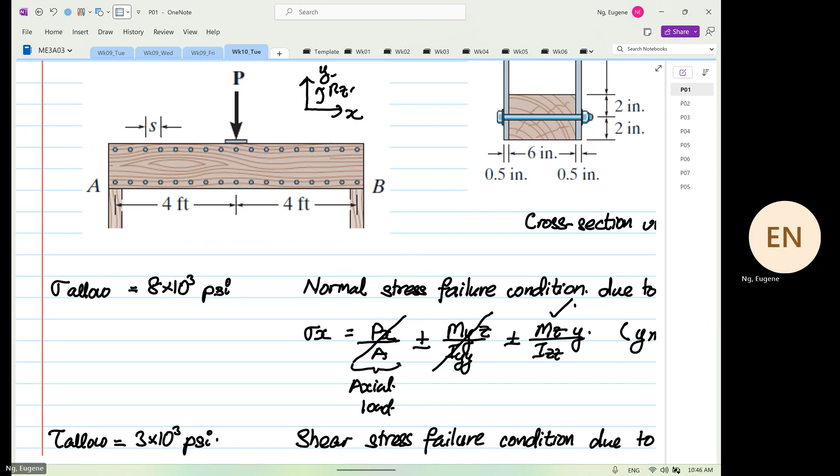So how do we do the experiment? I'm going to draw the schematics out.

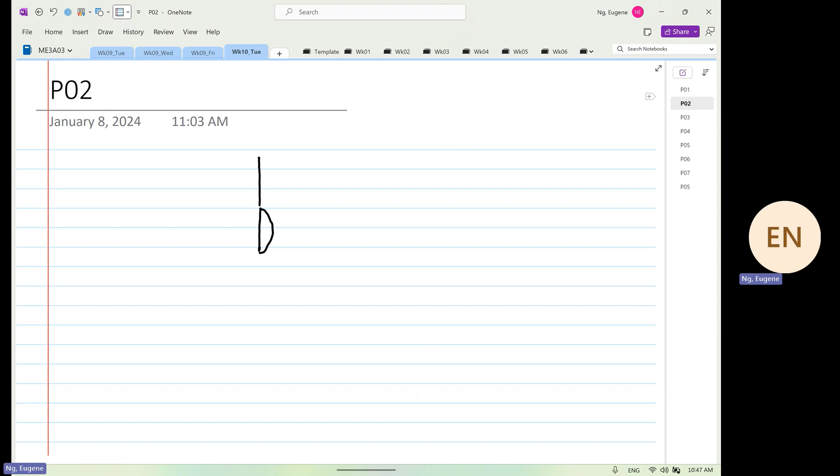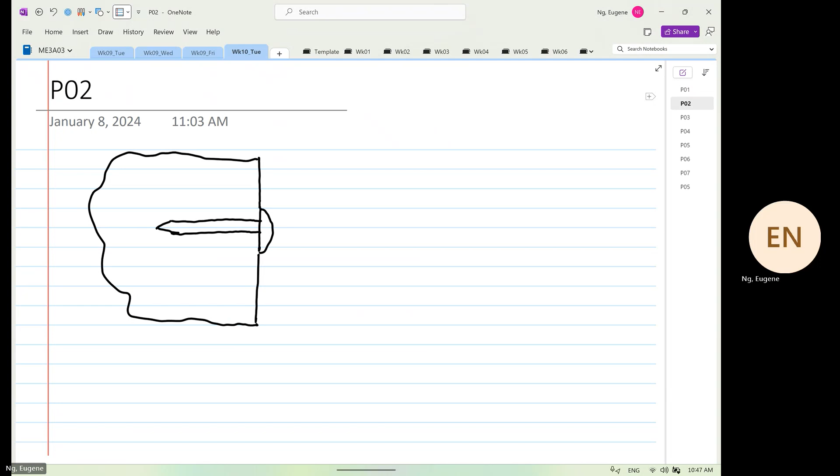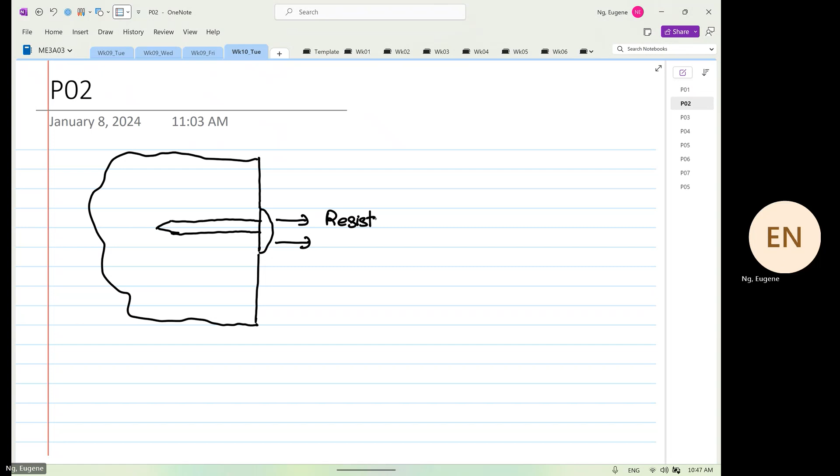So this is our nail, and this is a piece of wood. And this is our nail. To pull the nail out, you pull in this direction. So this is the resistance force. Let me put it as 1 nail. That is your resistance force.

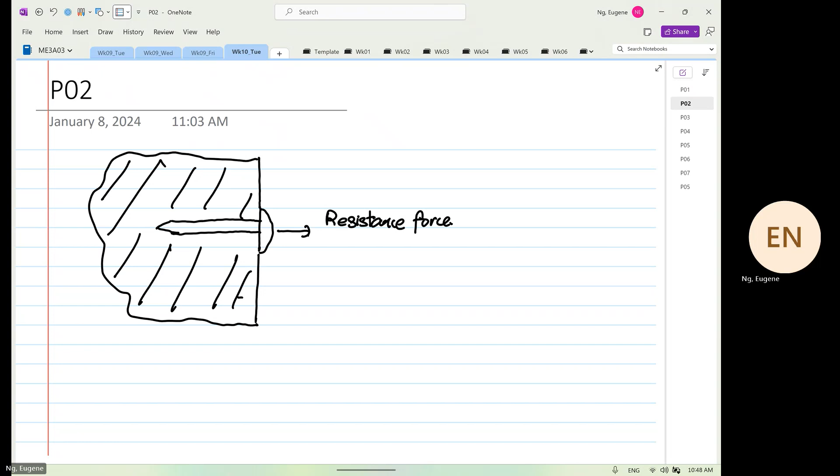Can someone tell me how this is related to shear flow or shearing stress? Anyone? Yes, there's a reaction force, but where is the reaction force acting on? If you pull out the nail, what surface are you hitting on? Vertical or horizontal surface, as you can see down there. So which part, is it the head or the body?

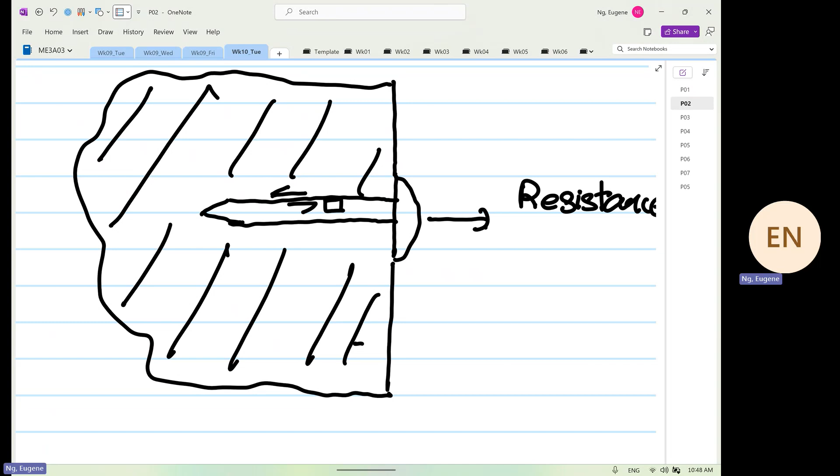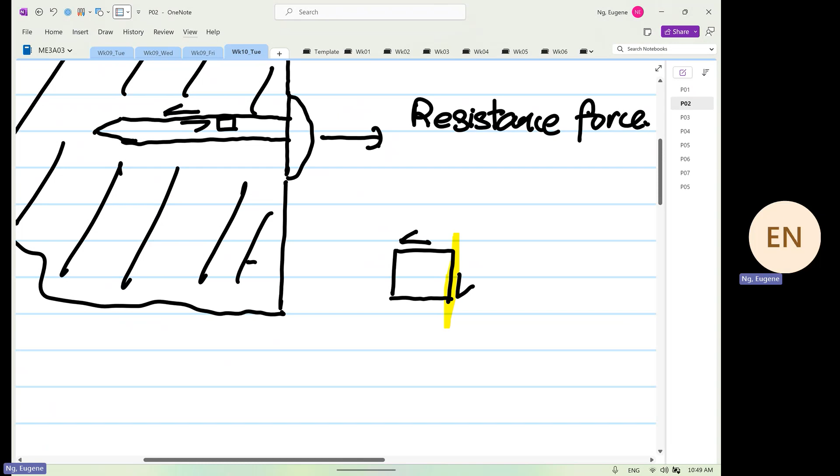Good. Where the resistance is, the nail wants to pull out this way, the resistance is doing this. If I put an element down here, the element will now look like this. This is the resistance force or resistance stress. And if we look at shearing stress, we calculate shearing strength on which surface? The vertical surface. Are we clear? So that is why when we determine the shear flow, we are still looking at the vertical surface.

This has to be very clear because the orientation is not the same. The orientation of the nail is running in the horizontal direction. Why are we calculating the vertical face? Exactly like how I explained to you why we consider the vertical face when analyzing shear failure. Are we clear?

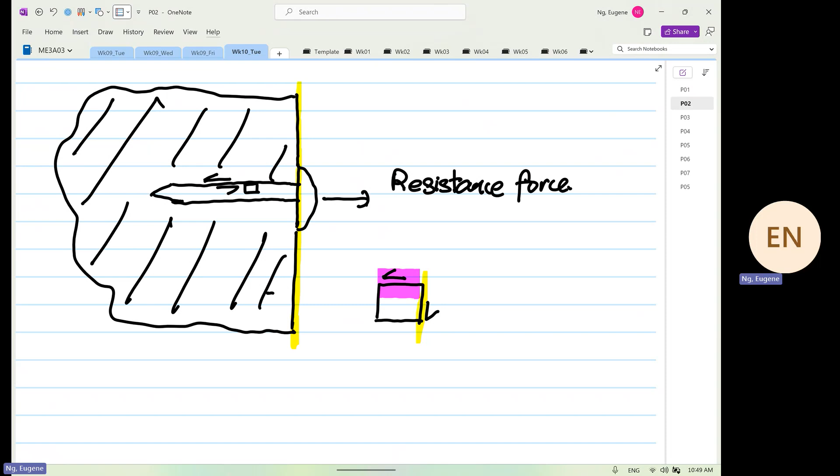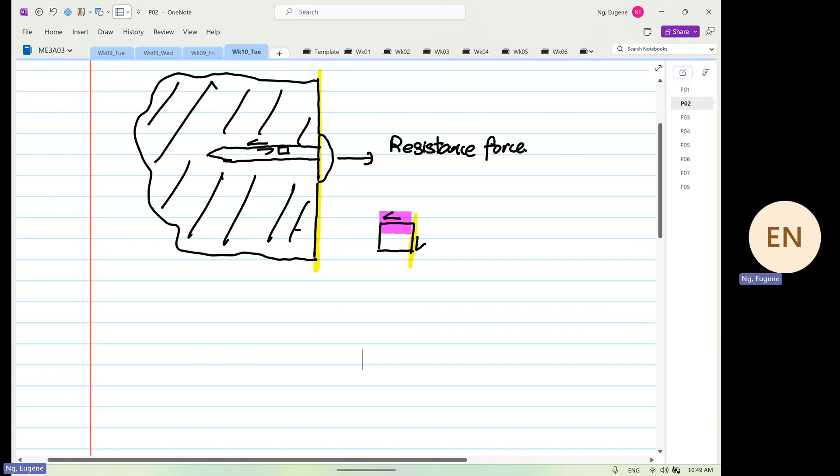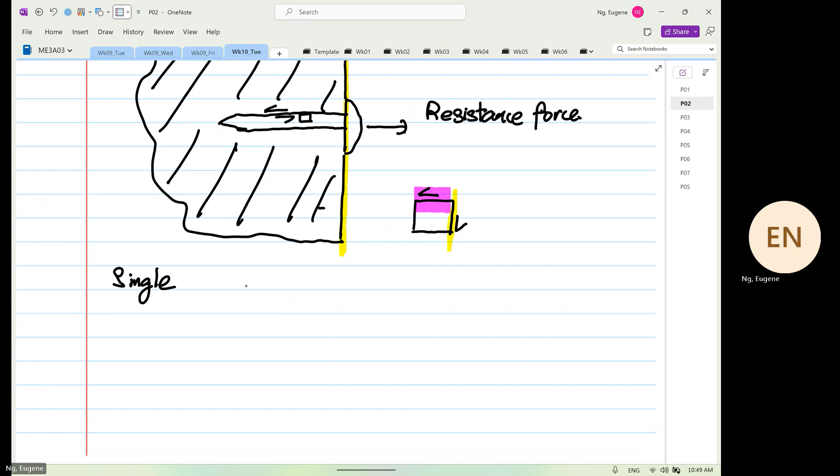Now, the next thing I'd like to recall for you is that in nails or fasteners, we have two things: single shear, and double shear.

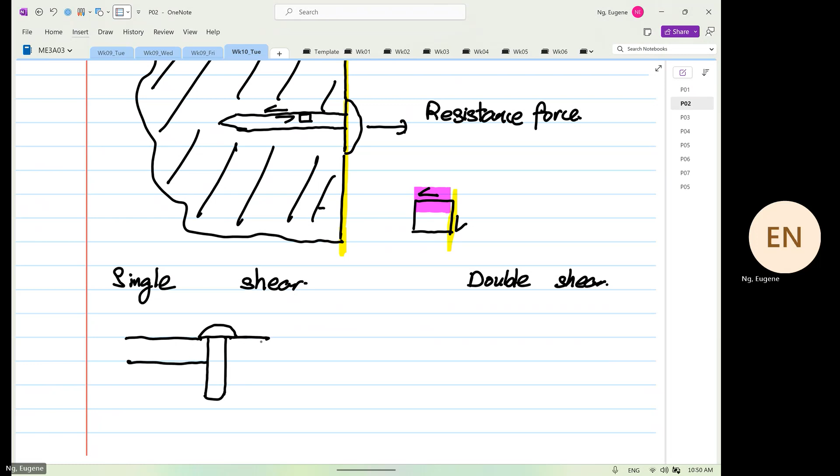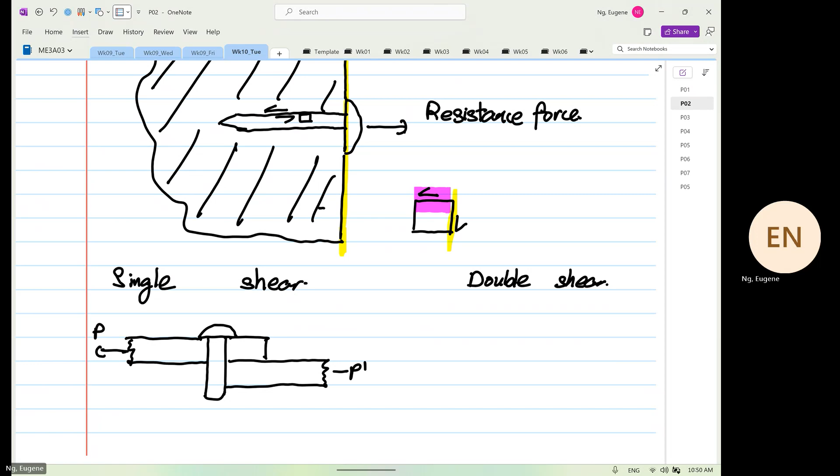Just to quickly recap with you, if I'm going to draw a single shear configuration, for this case, the shear stress is equal to P over A. This is your A, this is where failure will occur.

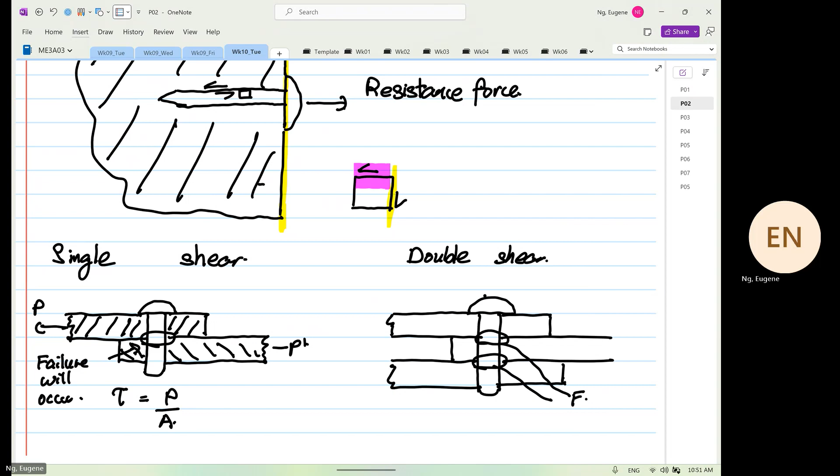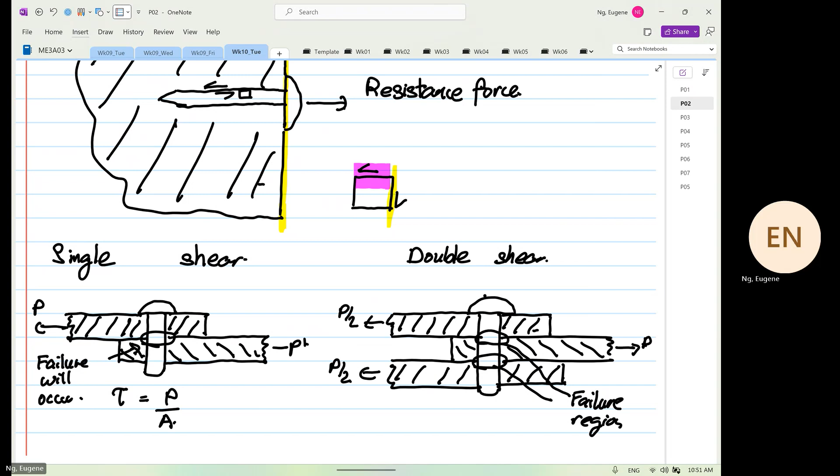In double shear, draw the nail first. So these are the, and these have an extension, do apologize. And for double shear, failure will occur in these two regions. So for this case, the shear stress is equal to P divided by 2A. The 2A is because the distribution is across twice the area. Are we clear?

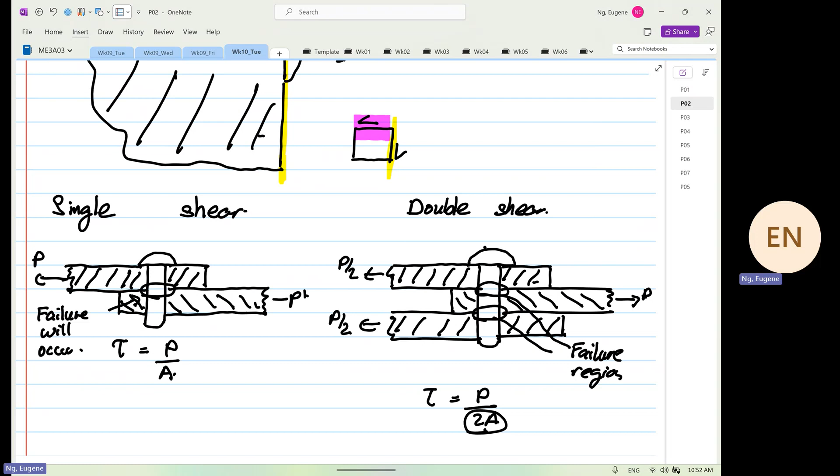So now, you know there's single shear, there's double shear. If you look at this structure, is it single or double shear? Anyone? Yes, double shear, well done. This is a classical case where you have double shear, when you have a shear force coming over here as Vy.

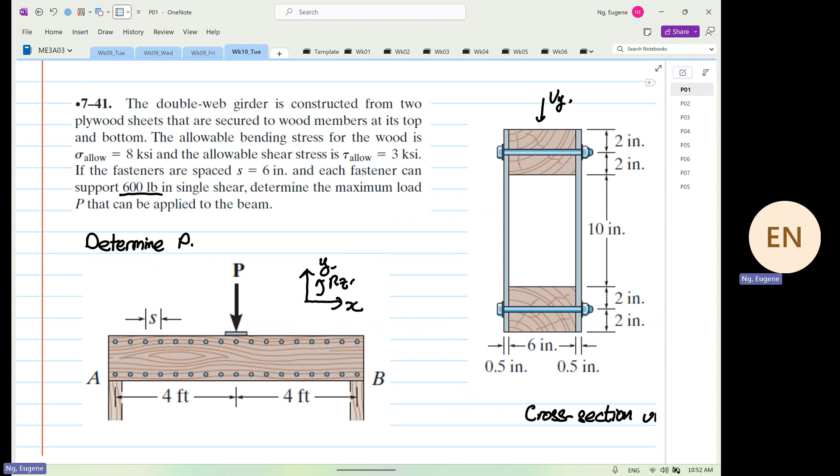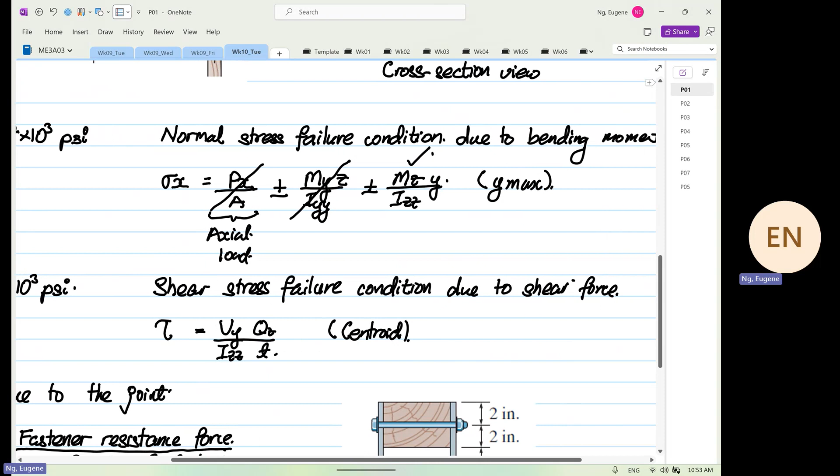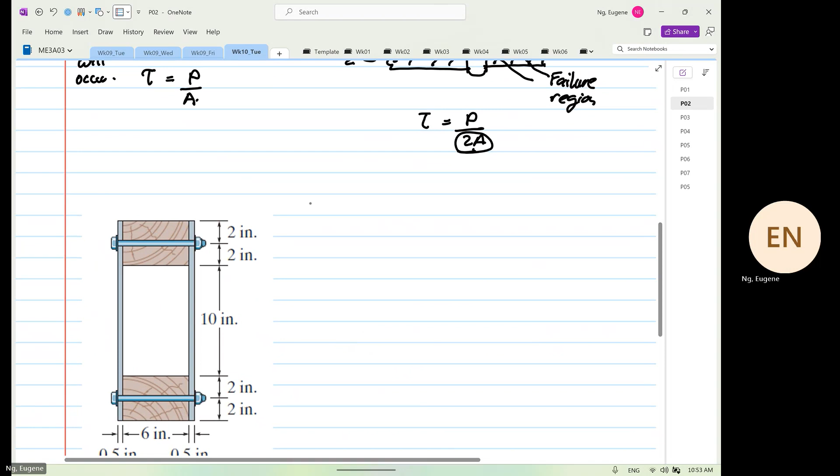So now we've got everything sorted out. We already know that failure will occur due to three reasons: failure due to bending moment, failure due to the shearing stress from the shear force, or failure at the joint. So now let's do the first thing first. Let's focus on what we're going to do first, which is failure due to the fastener.

Okay, we are going to determine failure due to the fastener first. So the first thing we are going to do is determine Q.

Q is equal to fastener resistance force, and then we're going to divide by the spacing.

So resistance force is 600 pounds, divide by 6, and then we have to multiply by 2, this 2 is because of double shear. So 600 multiplied by 2 divided by 6 is equal to 200.

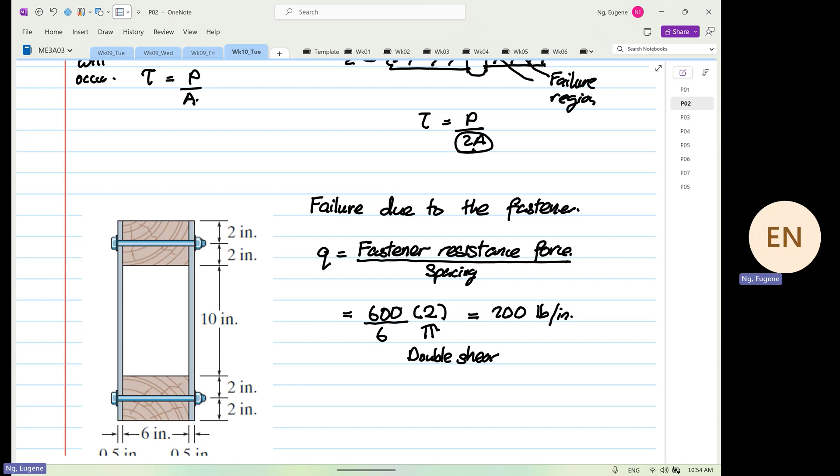Pound per inch. Okay, so now I'm going to find the second moment of area. We are given that the IZZ is equal to 2902 inch to the power of 4.

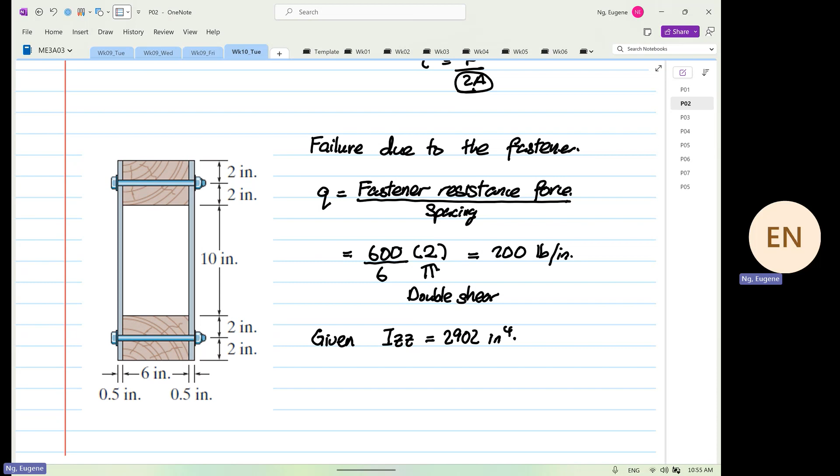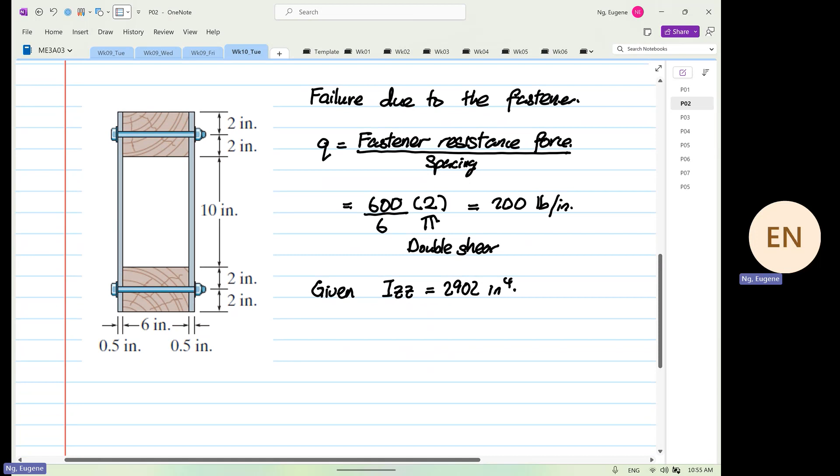So now the next thing we are going to do is find our formula, which is q is equal to VQ over I. We know small q, the shear flow, we know I, we don't know Q, we want to find V. So Q we would like to determine.

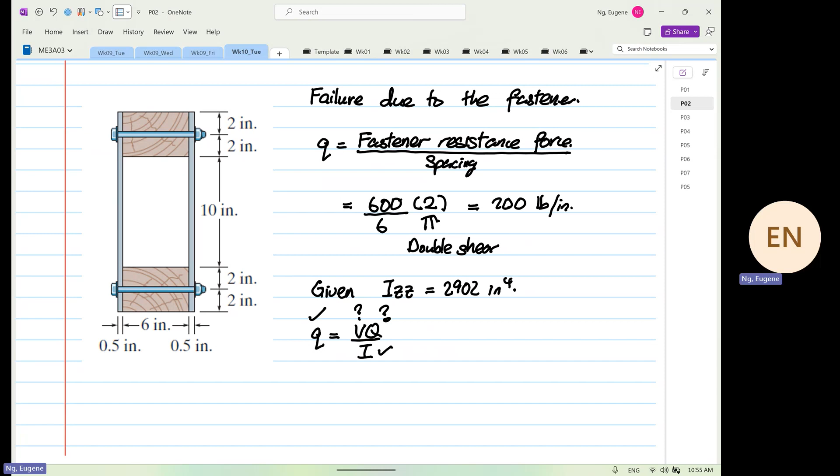So what will happen now is you have a Vy. We're going to apply the rule that the member has to distribute the shear forces or the shear flow. So the area to consider is this top area. Over here, this is our centroid. And the rule still stands, the first moment of area cannot cross the centroid.

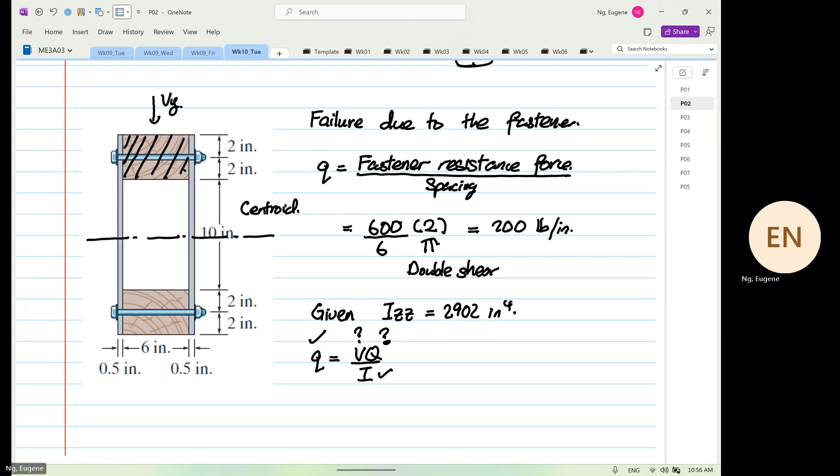So from here, we are going to determine our Q. Q is equal to our width multiplied by depth multiplied by y bar. So our width is 6, our depth is 4, our y bar is 5 plus 2. So this will be equal to 5 plus 2 times 6 times 4, which is equal to 168 inch cubed.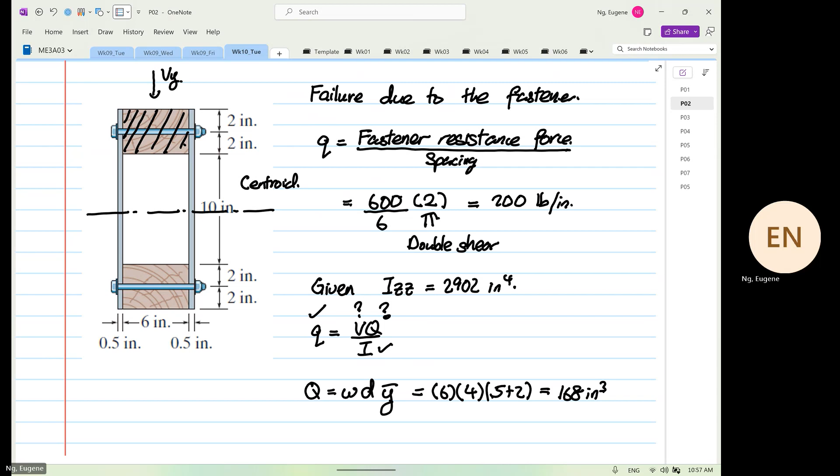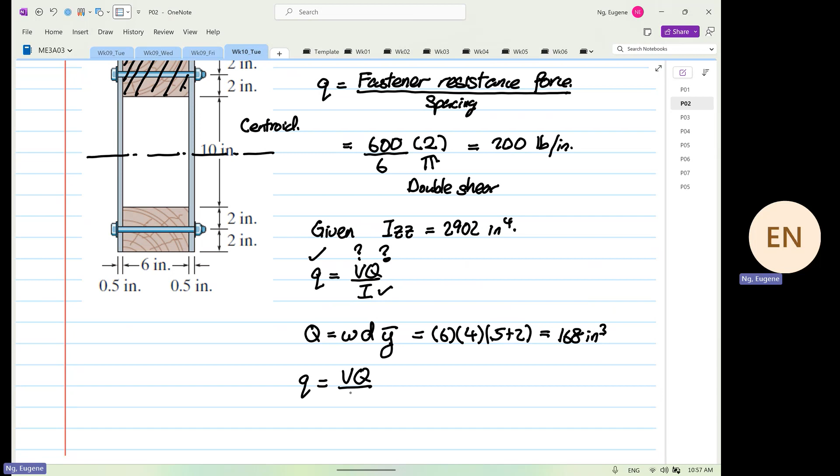So after finding this, we know that q is equal to VQ over I, and this will be equal to the value we calculated, which will be equal to 200.

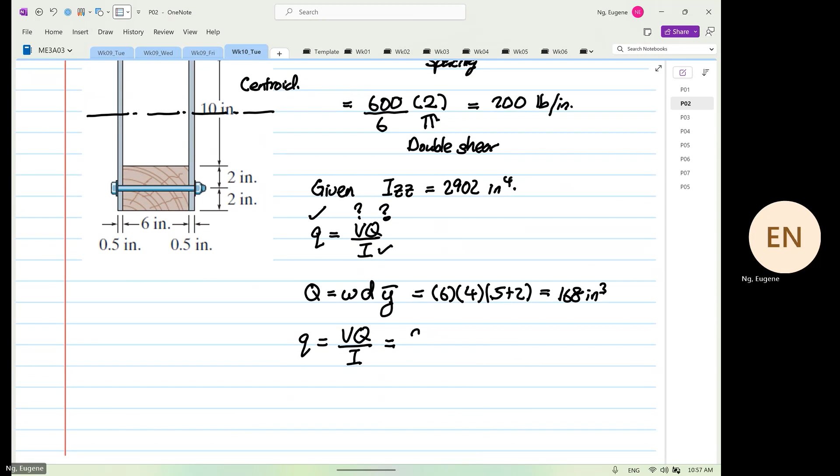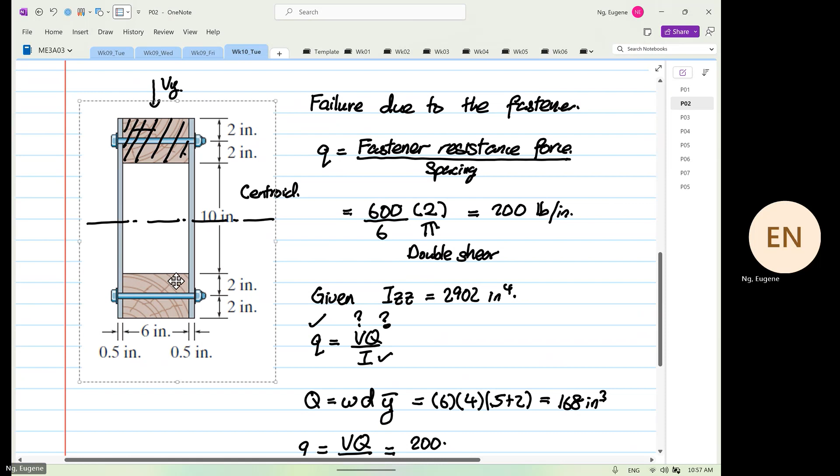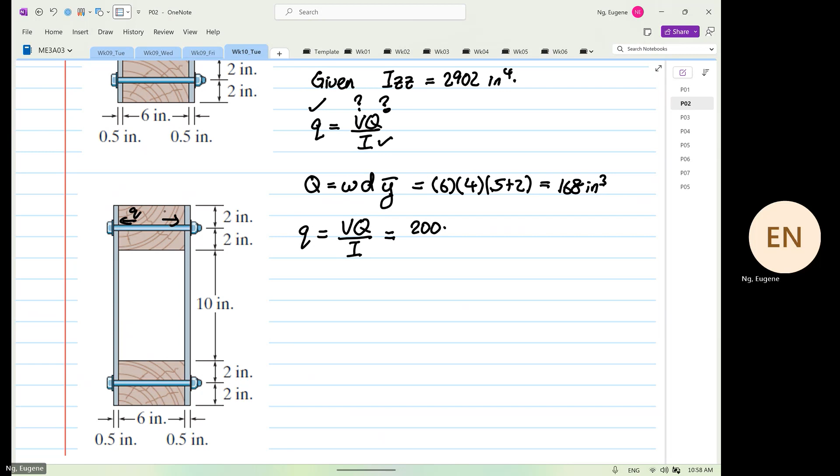So if you look at over here at the top, how we draw, the shear flow will go to the left, I'll sketch the shear flow on a different diagram. The shear flow will go to the left and will go to the right.

So from here, we need to find the relationship, or what is our V. So we know that q is equal to VQ over I equal to 200. So V is what we don't know. I is 2902, Q is 168, and this is all equal to 200.

So from here, your V or Vy, I'm going to change this to Vy, I do apologize. So Vy is equal to 200 multiplied by 2902 divided by 168, which is equal to 3454.

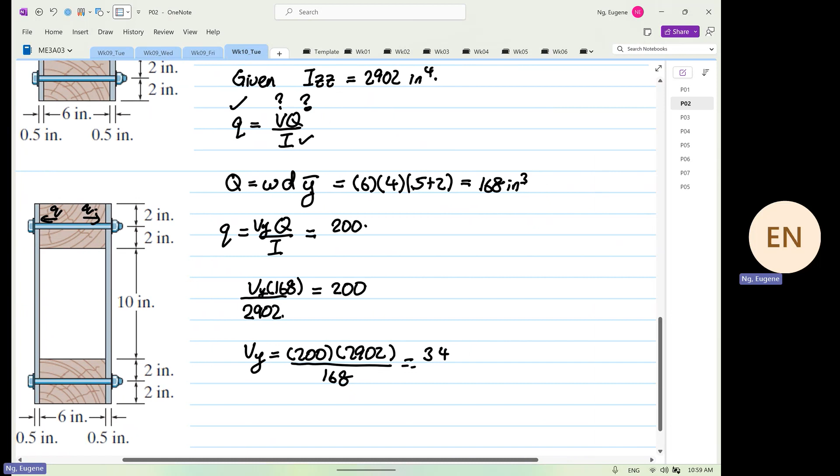So 3454 pounds. Now you have to be really, really careful down here. We just found Vy, and for this case, we have to note that Vy is not necessarily equal to P. Right? So we have to determine P.

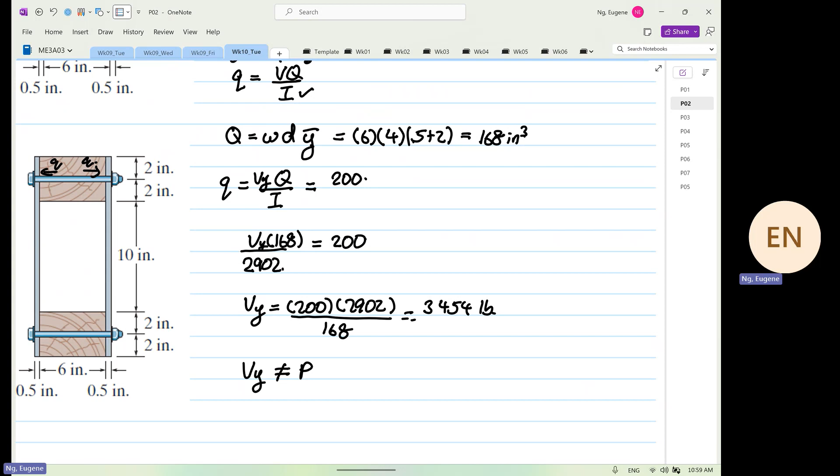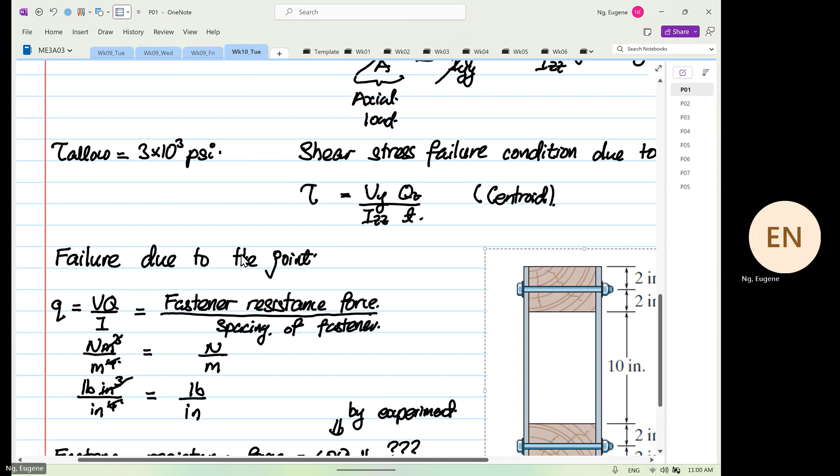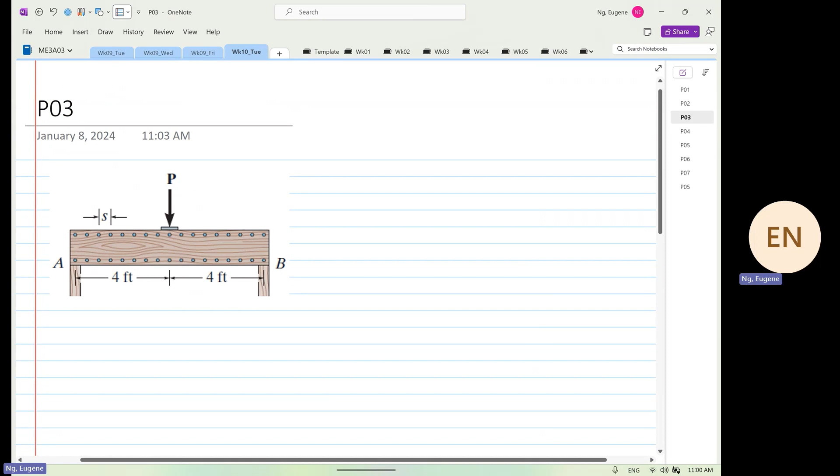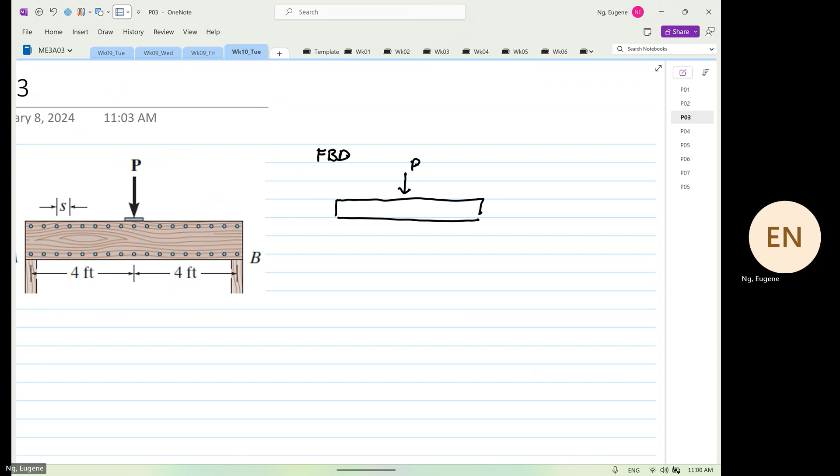Before we determine P, we have to now construct the free body diagram. Okay, so now we go back here. We construct our free body diagram. So over here we have a load, we have a beam. Over here is our P, and this is point A, this is point B, and we know that this is AY, and over here this is BY.

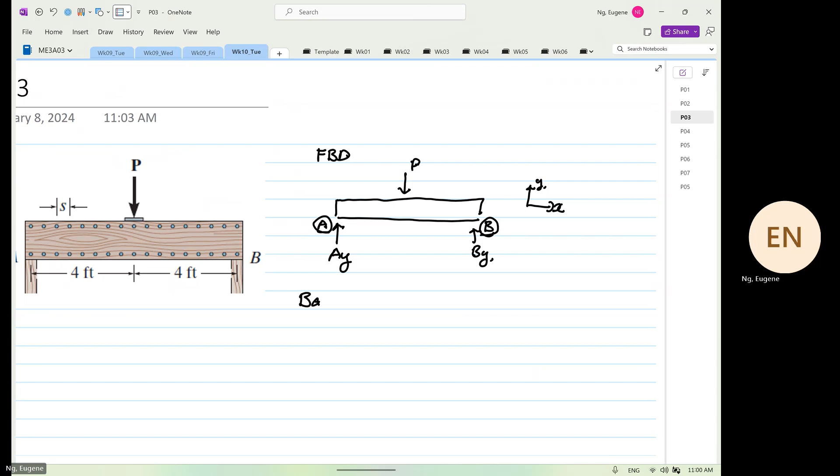Okay, so the next thing that you can write, this is your Ay and this is your By, based on symmetrical loading.